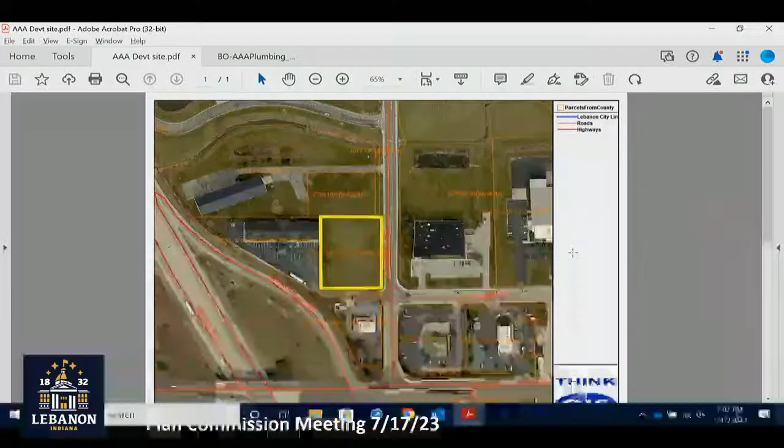Sure. Good evening, Commission. Thanks, everybody, for making it out tonight on a rainy evening. We'll get started here. If we want to go ahead and pull up the site map, we'll get you oriented to where we're at. We are just off of Sam Ralston Road.

The subject property highlighted in yellow, with I-65 all around the west. We've got the White Castle on the south, Quality Inn Hotel on the west, PSG Holdings with an undeveloped parcel to the north, and Aspire, a mental health facility, just to the east. Sam Ralston Road runs along the east side of this property. The developer is proposing to construct a 6,000 square foot speculative multi-tenant commercial building.

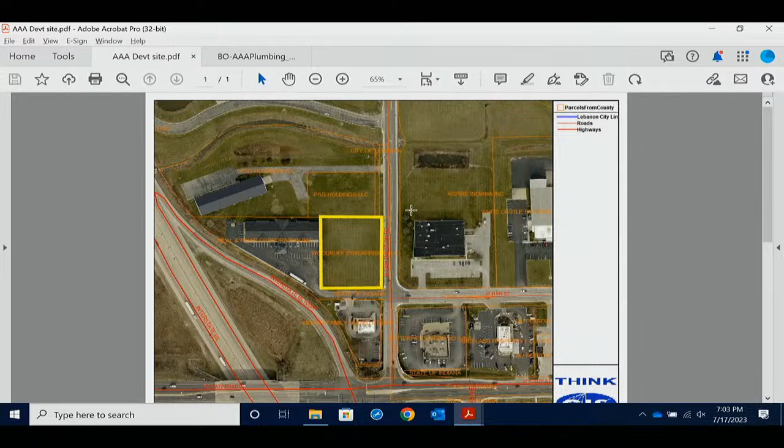We'll get into the overview here. On the site you're seeing now, north is to your right, so west is on the top of the page. Sam Ralston Road is running along the east side of this. What you can see here in the middle is the proposed multi-tenant, 5-space commercial development.

The developer is proposing one end for a drive-through, with a drive-through window at the end with appropriate queuing lanes along the south and western side of the building. The applicant is also proposing a pickup window on the north side, which is different than a drive-through. A pickup window is just for picking up your order, versus a drive-through where you place an order and wait for the food to be prepared.

On the south side here, we have a shared entrance, shared with White Castle, just off the screen, and the Quality Inn Hotel. There is an existing cut to the north along Sam Ralston Road, so this development would have full access on both the north and south sides.

Two-way traffic is proposed through the main drive aisle, but one-way traffic around the exterior of the building. We have 28 parking spaces proposed, including 2 ADA compliant and 2 dedicated motorcycle parking spaces. The applicant is also proposing, as shown in green, the appropriate perimeter buffer and parking lot interior landscaping required by the Unified Development Ordinance.

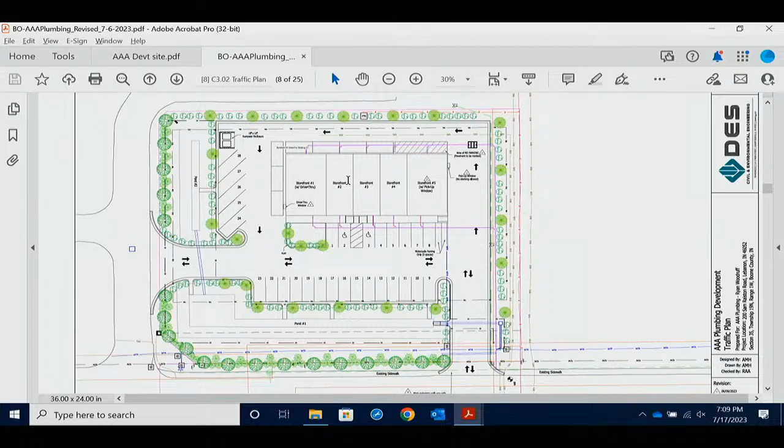The third condition, that the applicant submits a signage package that meets all applicable UDO standards for approval prior to submission for permits of signage. And then lastly, the applicant submits architectural plans and elevation drawings indicating proposed building materials that meet all applicable UDO standards and approval prior to submission of permits for any site improvement or building construction. And with that, I'd be happy to answer any questions that any of you may have.

Commissioner, any questions for Matt? Okay, hearing none at this time. The applicant care to step forward?

Good evening, Plan Commission. My name is Roger Azar. I'm the design engineer that you saw my plans up there. Matt, thank you for the very thorough explanation. We do intend to meet the 3. We addressed all the engineers' comments. We responded back with a response to comments, including the drainage.

So the 3 items that remain are the architectural plan, the lighting plan, and the signage. And the owner has communicated with an architect that will fulfill those requirements. We ask you today to please approve that with the conditions set forth.

The site has been a fill area. They brought in a lot of materials, maybe when they built the 65 ramp, or maybe when they built the hotel. So there's a lot of studies that we need to complete on the site. We did preliminary geotechnical work and found out that there's quite a bit of fill. So the owner wants to proceed, but he is very reluctant to spend any more money because it's going to be costly without your approval. With the other 3 items being conditional, obviously he's not going to get a building permit until those conditions are met. So we please ask your consideration to approve that so he can continue moving forward with this development.

And on top of that, I want to show you some items. Is this working, Ben? Can I show these? I'll pop it on. How do I? They'll give it, just a second. Well, I guess I'm not going to be able to do that. It's there, just give them a minute. Is it up there? Okay, great.

As you can see from some of their cross-section profiles, they're going to be raising the entire site. That highlighted area is fill, and that's right where the drainage is. They're going to be raising the entire site in different places by about 4 to 5 feet. The whole site is going to be about 929 feet. So that's many feet of fall onto our property.

Their proposed drainage outlet, well, it's not really an outlet. They're just going to open the floodgates and let everything flow into what they call a swale. It's not really a swale out there, it's very flat up there. There is no swale on Sam Ralston Road. They're just going to let the water flow unimpeded from their property line to ours and to the roadway as well.

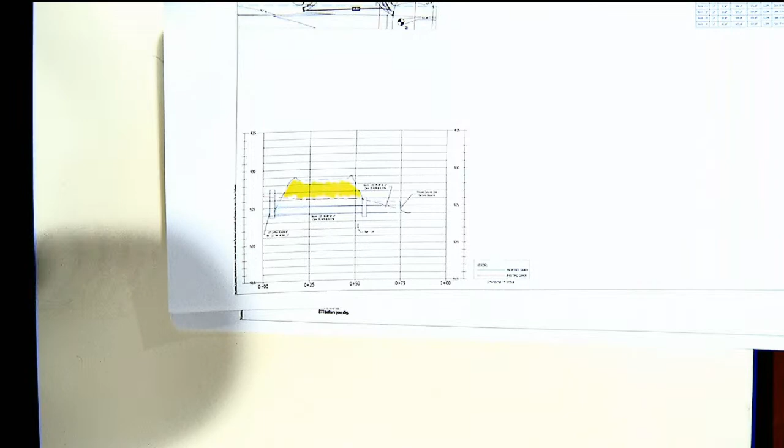Carrie Daly, who, for those of you who might be new to this plan commission, is the outside drainage consultant for the city of Lebanon at Christopher Burke. He caught this issue right away, and he indicated that the drainage outlet should be piped.

Our northern property line between PSG Holdings and Menards is a big legal ditch. It's a very deep legal drainage, county legal drain. He indicated that they wanted the stormwater discharge to be piped all the way from their northern property line through the right-of-way for Sam Ralston Road to that ditch at the intersection of Sam Ralston Road and the ditch.

We also have no objection to providing them and working with them on a drainage easement of some sort if that's not the appropriate location to put it. But we've really had no communication whatsoever from them. They entered onto our property without consent or knowledge and drove a PK nail through our driveway, and that's about the only extent of communication we've had from them. That said, we have no intent to charge them for a drainage easement. We just think it's in the best interest of your roadway, of our potential future development of the outlot, and for their project as well, to pipe the water underground all the way to the drainage ditch.

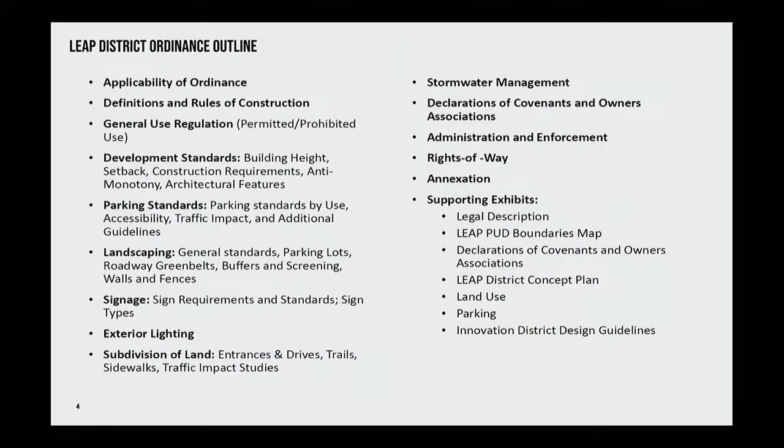The standards are called dark sky standards, and I'll talk to you about what that is as well. This ordinance before you today is a full-blown PUD. It's gone through full legal review, and it has a number of supporting exhibits at the end, and we'll go through what that means.

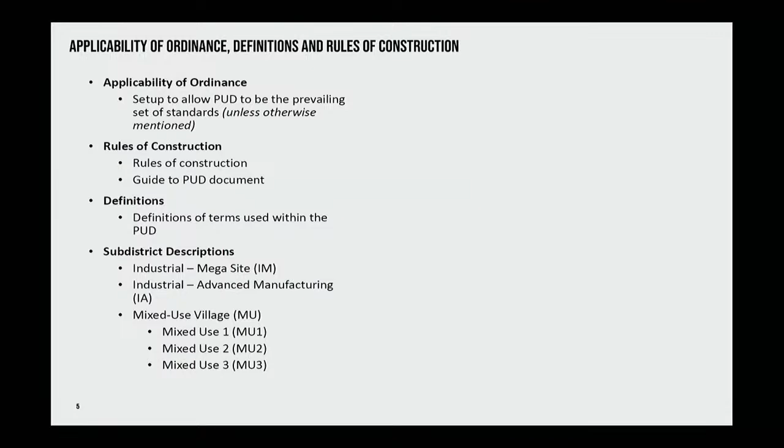There's also the administrative function of it. It works with the city's existing UDO and PUD process, which allows for this to be set up in such a way. There's rules of construction, there's definitions. As Scott mentioned, we've paid a lot of attention to definitions, and we're really trying to tighten those up at this point for the benefit of the community. As far as zoning, this whole area is the LEAP zoning, but what we've devised are sub-districts within those that have their own set of standards, and we'll go through that in a moment as well.

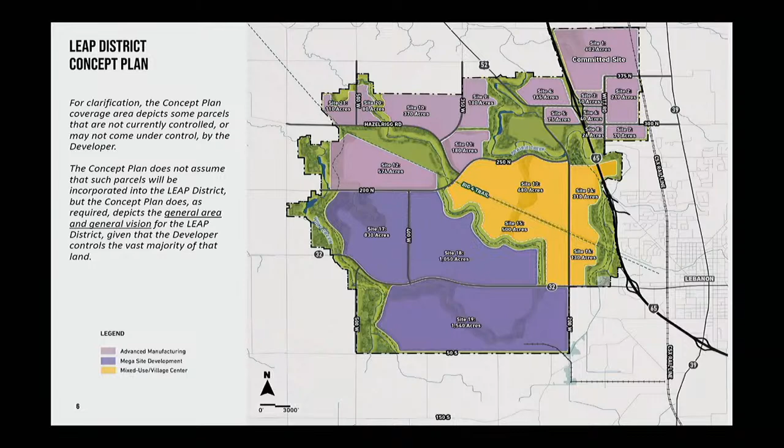As far as the concept plan is concerned, we talked about that larger development scale stormwater approach. We'd like to really focus in on those areas and direct some really innovative stormwater approaches to those places.

This is a traditional PUD in that it has a list of permitted and conditional uses, as well as some expressly prohibited uses. As you're aware, the city has additional conditions that can be put upon conditional uses as we go through this ordinance. We've illustrated some of those for specific uses where there's things that, for instance, the IEDC wants to make sure are covered as a development comes to the table with a potential conditional use. And then you all, as a plan commission, can, of course, add additional conditions.

As we look at development standards and design standards, I'll point to a couple things we feel are very innovative, but also offer significant protections for adjacent properties outside of the LEAP district. So I mentioned natural corridors. In general, those would be existing stream corridors that may fall on the outside of the district or within the district. A lot of them are channelized ditches at this point, but there's really an opportunity to bring back and pay attention to that.

The term is replumbing, but thinking about how we can really direct stormwater to areas that are naturalistic, that would include wetlands, so that stormwater could be cleansed before going into that area. And then, of course, developing amenities.

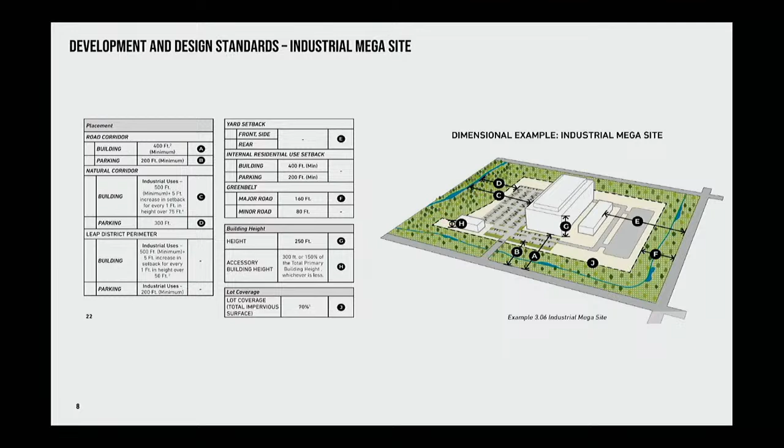I'll keep going through - advanced manufacturing is the other district we talked about. This district has a similar sliding scale perimeter setback along the LEAP district. Along the natural corridor and the road corridors, it does not have the sliding scale setback, but still has a significant setback at 300 foot along a major corridor - a state highway, for instance, would be a major corridor. There's parking setbacks built into that as well. Along the natural corridor, it would be a 400-foot minimum.

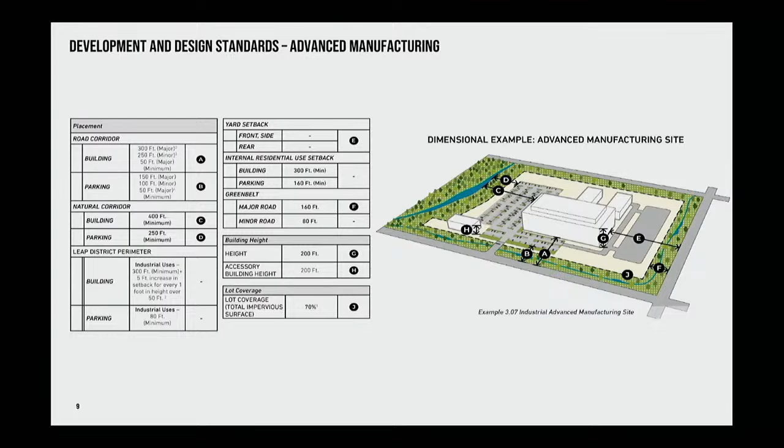The height is significantly less on the advanced manufacturing sites, so that justified the step down. Along the perimeter, you have that same degree of intensity with the district perimeter, with the 300-foot minimum buffer there, with a 5-foot increase for every 1 foot in height over 50 feet. And then that 160-foot required planted buffer is a requirement within this area as well.

So this kind of breaks it all down here. But you can see we've put a lot of thought and attention into what happens in these setbacks. Parking can occur, but not within the area of that 160-foot greenbelt or landscape buffer. Within that buffer you can have roadways, sidewalks and trails, fencing, things for public safety - that's about it, and it's a heavy landscape buffer. 160 feet is a large, expansive area.

And this is an example of graphically how this might lay out. So what you're seeing here, on the bottom of the screen and the top of the screen, on this large site, is an example of that 160-foot roadway greenbelt. And then within that also you see the 500-foot setback, and you see parking - well, parking's got to be 200 feet out. So essentially you've got that 160 foot, then another 40 foot, then you can start to have parking.

The goal there is that with that 160 foot district perimeter greenbelt, which is heavily landscaped, once those trees have matured, you will not see that parking at all. There also may be fences and berms required as part of that as well, to provide more of a quicker impact as trees do grow over time.

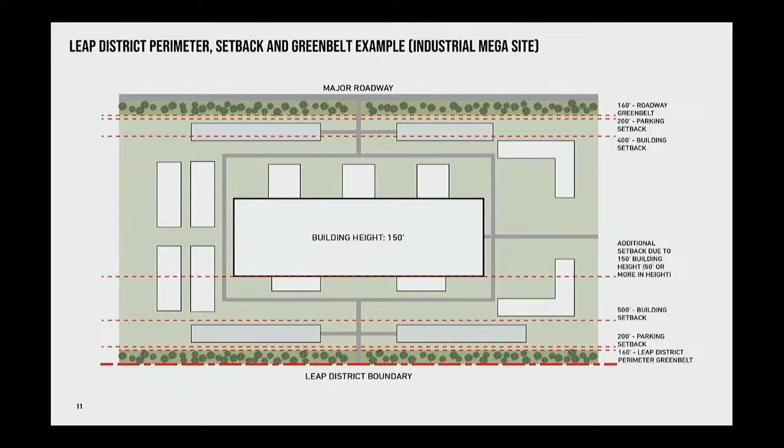Residential setbacks—there was some concern about how a development might work with an existing residential. So we've put together the same level of standards that we shared with the prior one, including that large setback, the 160-foot greenbelt in that area as well.

You can kind of see on the right-hand side of the screen how the properties, whether or not they're on a road, would be protected by that greenbelt. And then there's an additional building setback. Parking could be in that building setback, but even with a 50-foot tall building, you're several hundred feet away from that development. That's an additional way the IEDC felt we could accommodate and ensure that residents today, as well as in the future that might be on the perimeter, or property owners within the interior of the LEAP district that choose to remain in their home, would have that significant and protective buffer.

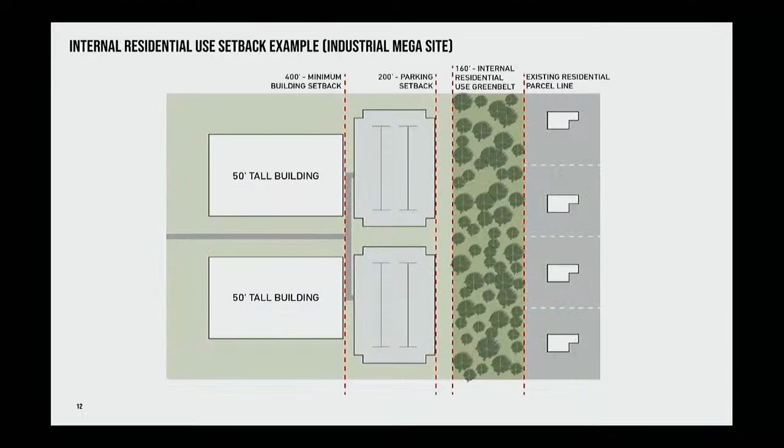Real quick, just for confirmation—so the slide directly before that had the road frontage with the setbacks. So even if that residential were at the side of that building, it would require those setbacks as well. So it's not from the front, it's from whichever side that residential is on, correct? That's correct. So that's why we have both the roadway setbacks and the interior setbacks, to try to create protection from all angles, because we know there will be some instances where there isn't a road buffering between a residential property and an industrial property. In a lot of cases it will be a road, since most people are situated on county roads, but we wanted to make sure we baked that protection in just in case. Okay, perfect, thank you.

The mixed-use district—we've talked a little about this. The idea is that this is another area that, as it's developed, would be buffered. So as we were thinking about the map I showed earlier, there's the creek that goes through the middle of the site, meandering from the north down to the southeast. The idea is that north of that, and also along the Big Four Trail, we could begin to see a mixed-use area develop.

We've put together fully baked standards for a mixed-use walkable district that could service this district, with appropriate uses associated with that. We think this could be a significant opportunity for people to live very near where they work as this area develops over time. Think about trail-oriented development, think about Midtown Carmel—maybe with a little drop down in scale—but think about how the Monon's been activated through there. That's really how we've written these standards around the Big Four.

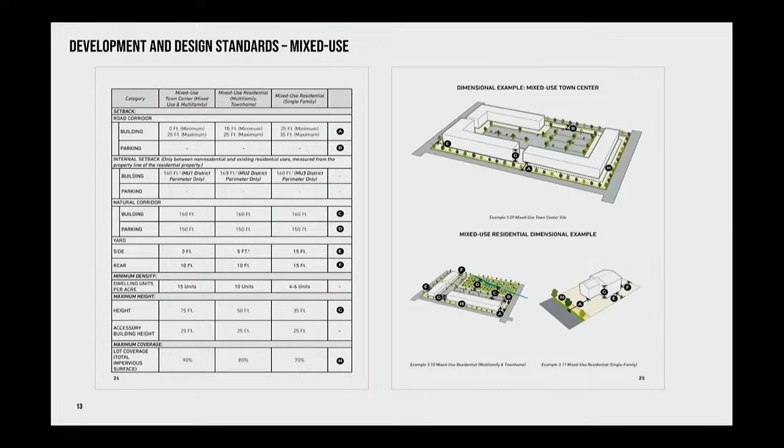The idea is to allow for what we call mixed-use town center, which is mixed-use and multifamily development in certain areas, allowing for a step down that would be smaller scale multifamily and townhome development, and then also potential for single-family development in this area as well. I think that would be further defined as a development plan might come before you in the future, but we wanted to allow for that zoning to be in place if the right development came to the table, so it could be considered as part of this process.

Other standards we've brought to the table and worked closely with the city on are how do we make the aesthetics of these buildings—whether industrial, commercial, or even residential in nature—develop in a way that's very intentional. We've heard a lot about what people don't like about development that has occurred over the last several years along our major interstate corridors, so we've taken a lot of that into account. We've thought through heights, encroachments, locations, where to site a building, how the building should face a major corridor, and also architectural performance standards.

And by performance, I don't mean sustainability at this point, but more design standards—where should facades be broken up, where should materials change, how should we treat corners. These are additional standards we've included both in the PUD itself as well as the design guidelines. The goal would be that as a petitioner comes to the city, they can sit down with the design guidelines and say, let's really think about how we can achieve something of this quality—and, by the way, we require this in the PUD as well.

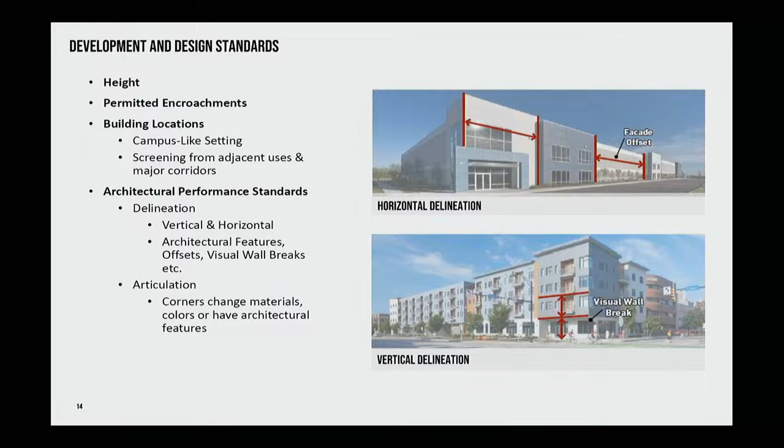Anti-monotony - you've probably seen that required in a lot of developments, but we require it for all districts. The goal is to not create no-place architecture. We really want to emphasize architecture that creates quality of place, whether you're in a mega site or in the mixed-use district.

Other important things include outdoor storage, dock doors, mechanical installations, and loading and service standards that we've written in. Those are also heavily buffered and landscaped, and need to be sited intentionally. In some cases a traffic study might be required to make sure a loading area is properly sited along a corridor and isn't causing a traffic issue.

From an environmental perspective, we've done a lot of research on best practices throughout the country and are trying to bring some of those forward to this district. Some users, Lilly being one, are very interested at a national and international level in being at the forefront of thinking about energy and materials - how they develop a site in a way that attracts top talent while being light in impact, knowing they're developing a large site.

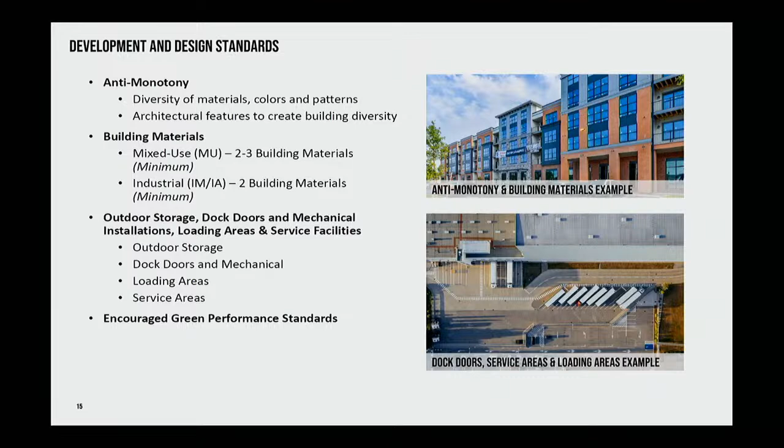Parking - we've thought a lot about it. A lot of these big users likely will do their own parking study, but we have baseline standards that also respect the standards in the UDO. We've been thinking about shared parking, reduced parking, and new technologies tied to parking like electric vehicles that need to get integrated into the standards.

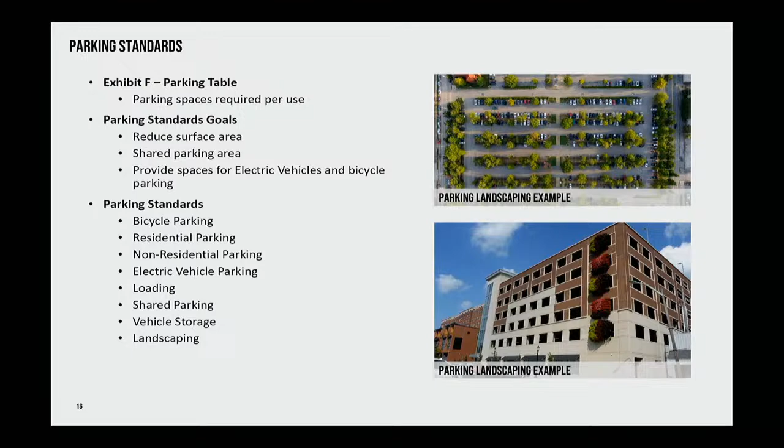You see the image on the top right - the parking lots need to have significant landscaping and stormwater features, so we built that into the standards as well. Bike parking is also included, and we've thought about how those different parking types work together to create a shared transportation system - not just about parking and going to your destination, but really thinking about parking once.

I talked a little earlier about roadway greenbelts. We feel this is a really innovative way of thinking through these corridors, while also providing significant buffering areas and a place for stormwater to occur. I mentioned the 160-foot buffers in some of the interior areas.

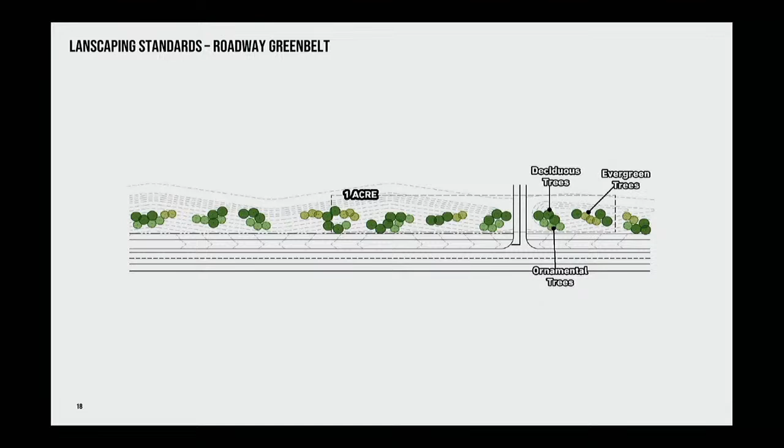This is just an illustration - not a perfect example, but you can begin to see how you have a very significant buffer that starts to fill in, with trees and landscaping clustered. This area would include trees of different sorts with a focus on natives, really trying to promote Indiana native trees, as well as required shrubs and grasses that could be planted to create a prairie type buffer for additional screening.

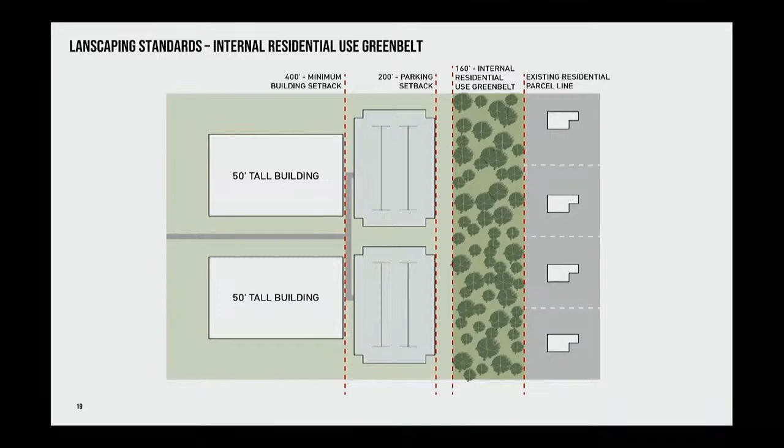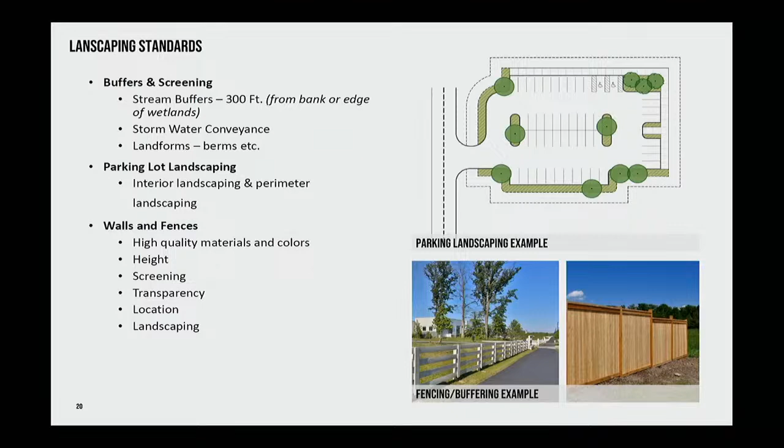As we think about these buffers and how they're intentionally landscaped, the idea is to create something naturalistic, resilient, and relatively low maintenance, while building upon these areas. We talked about parking already, but it's important to reinforce that we're trying to bring best practices to the table for parking, buffers, screening, as well as fences and walls - we've got pretty robust standards for those too.

Signage - we've looked at the city's UDO, brought forward some of those standards and respect them, and included additional standards, especially in respect to the dark sky friendly goals I mentioned. That applies not only for buildings but for signage as well.

Dark Sky is a national, international organization trying to think about how to reduce light pollution and energy usage. Breaking it down simply, we've looked at the maximum amount of lighting intensity, called foot candles, required when a particular use is operational, when it's not operational, and what's required for public safety - we've tried to bake that in.

What we don't want to have here are huge billboards with 24/7 lights, like a lot of our gas stations or convenience stores with big bright lights. We really want to try to tone that down. That helps in a lot of ways—adjacent homes have talked about and are concerned about lighting and in particular light pollution. We also know light pollution is a detriment to our natural world and our wildlife, so we're really trying to bring what we believe is the forefront of thought on this to this project.

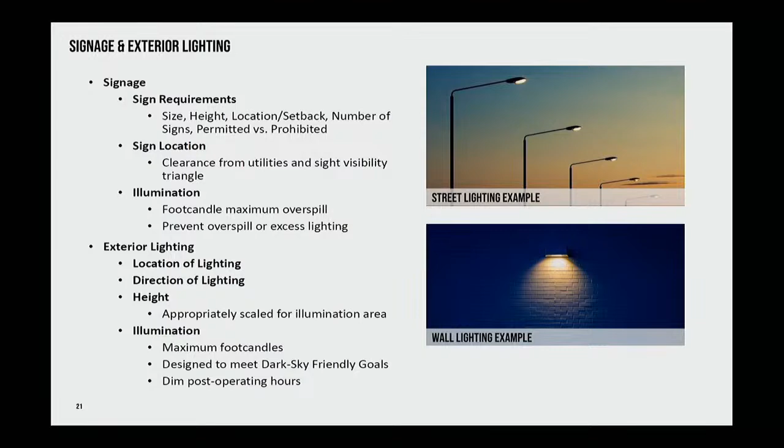It's an emerging science and an emerging best practice in zoning and subdivision of land. We're really focused on being intentional, but also rooted in the city's UDO, thinking about how properties are accessed, where trails go, where paths and sidewalks go, requiring all those things to work together as part of a network. We talked with the Trail Advocacy Group about the need for trail crossings and intersections, so we've built in standards for creating safe crossings.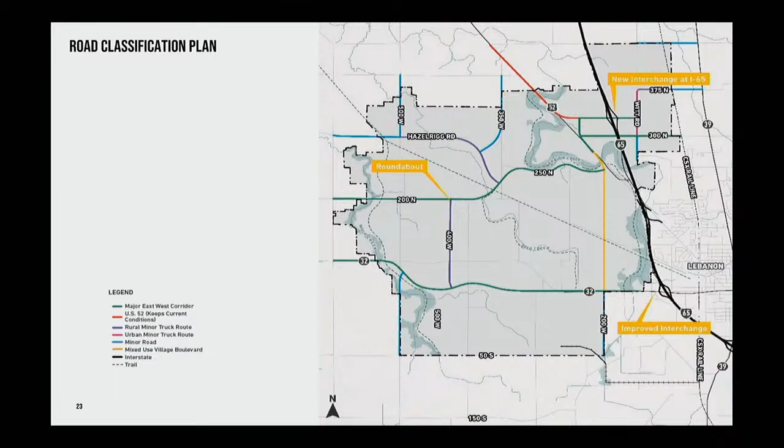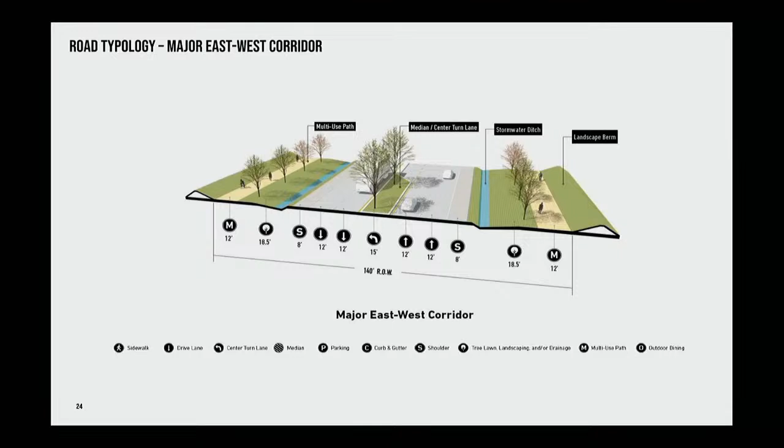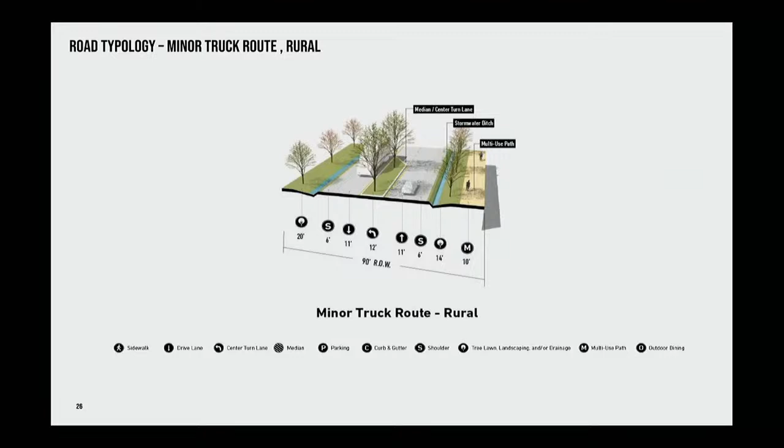If we think about roads, it's really about how we bring this together—how we manage stormwater, how we create significant buffers and berming, and how we provide good quality pedestrian infrastructure in a way that also allows traffic to flow as needed without causing issues. I won't spend a lot of time on these, but we have a whole host of different corridors defined in the ordinance, as well as different road types illustrated in the design guidelines. So we're thinking through how we can be intentional as we improve and build new roads, bringing something to the community that benefits this whole district, while thinking intentionally about how it all works together.

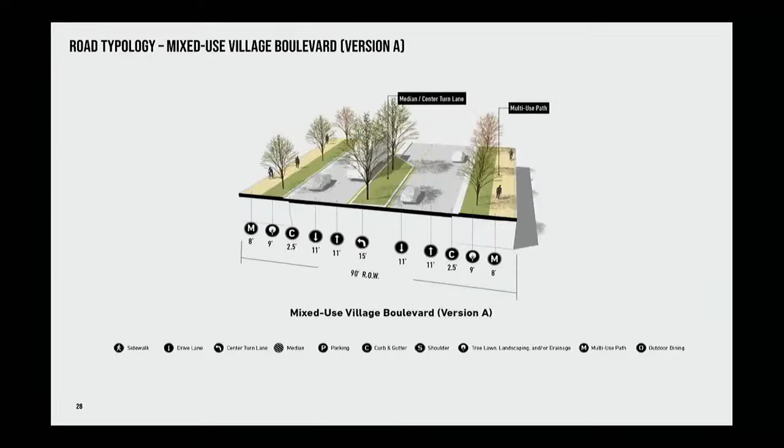I talked a lot about stormwater, but we're really excited about how this is a best practice and how it can create innovative stormwater district-type retention and detention strategies. We definitely respect the state and city's requirements, and we're going above and beyond—35% of stormwater must be retained or detained on site. But for that other stormwater, we're really trying to push the envelope. Stormwater banks are something emerging throughout the country.

This ordinance enables a group such as the owners organization to create a district, and within that district, stormwater credits could be bought by an individual user. They could essentially pay an impact fee into that, and then they'd have a portion of the site that would be off-site of their own, where their stormwater needs would be dealt with. It would not be a giant pond—it would be naturalized. I talked about stream corridors, and you could have wetlands built along those corridors.

The idea is that if you combine that with wetland mitigation—and we've had Christopher Burke looking at that, they're leading at the state level on what's called the ILF, the in-lieu-fee program through the DNR—we could have regional stormwater detention, by regional meaning the LEAP district, and also wetland banking for any impacted wetlands. You start to knit together this green network. That could become part of a significant central park strategy, creating a large area of parkland with a lot of different resources, both financial and property, that could be added to it, really doing some innovative things for this site.

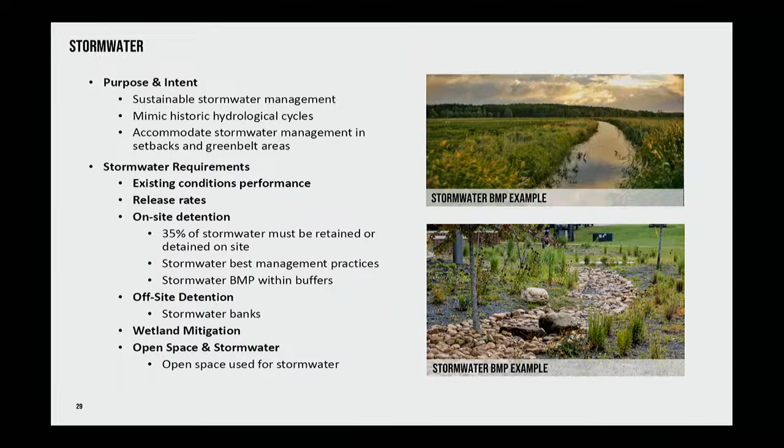We don't have oceans, we don't have mountains, so we wanted to really try to create something that's really special, and stormwater and prairie, kind of thinking about our creeks and streams, was something that was very important as the master plan was developed. So as we get to the exhibits here, we went through, I'd say, the bulk of the design guidelines as well as the PUD itself.

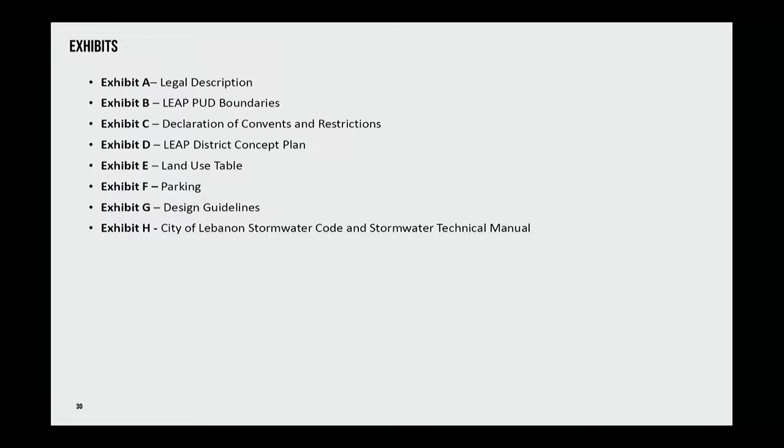We've got a use table, the parking, concept plan, so we've explained a lot of that. The legal description is many, many pages. I don't know that anybody wants to look at that tonight, but it's all prepared, within the full ordinance there.

The idea is that the Architectural Review Committee would be one more level of sign-off, and that group would have representatives from the city as well as the owners' organization and the county, to make sure comments are addressed even before it gets to TAC. Then from TAC, the plans would be modified, there'd be staff review, any required hearings, and then ultimately a development would be approved. So that's the process we've set up here.

So, good to be back before you with this update. We did have materials available and took public comment on this future land use and comprehensive plan update as part of the community open house we had back in June.

This is the official process through the state, as assigned by statute, to think through a guidance document. As Ben mentioned, this is really thinking through what the future land use for this area and the LEAP district will be. It memorializes the thought put forward as part of the LEAP master plan. Ultimately, the land uses are then codified as part of the PUD. The goal would be this land use update, as well as the LEAP Lebanon master plan, would be available on the city's website for public review and consideration.

The process follows statute and updates the future land use map to include the newly annexed property and the area identified as part of the master plan. We've provided recommendations on initiatives and objectives that match the master plan in the district, and we had the community open house. This follows a similar process to the PUD, but it would be adopted by council via resolution as opposed to ordinance, so it's a little different there. All this would be public on the website, a great way for people to view and learn about these changes, as well as stay tuned for future updates.

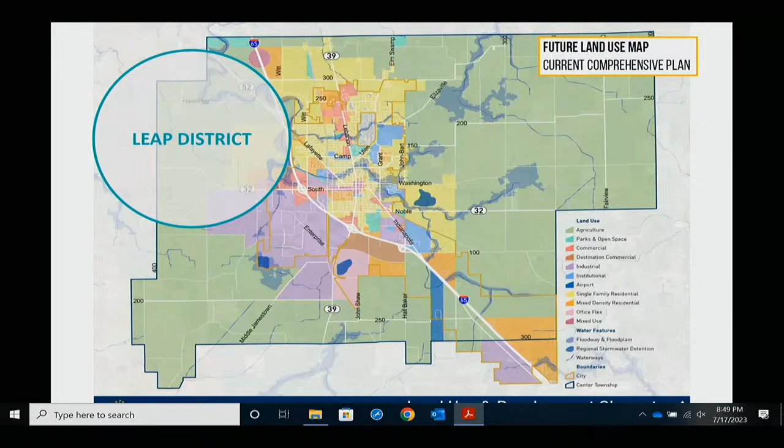So the current comprehensive plan, you can see the circle on the top left, the northwest, the LEAP district, wasn't detailed in the prior comprehensive plan. This brings forward what was considered as part of the LEAP master plan. This is a typical process when a master plan or area plan is done; communities often update their comprehensive plan with those recommendations. In this case, it's the larger LEAP Innovation District, and within that district, as we talked about with the PUD, there are a number of sub-districts or sub-areas with additional descriptions and information helpful as the community considers future development of this area.

With that in mind, we talked a little about the schedule, but we hope for a favorable recommendation and the ability to advance this to council on the 24th. Happy to answer any questions.

Real quick, just to clarify, you showed us the map of the LEAP Innovation District, and one of the questions that came up earlier was, what's the timeline? From my interpretation, when we look at these maps with boundaries that don't include houses, that sort of thing, we're talking 10, 15, 20, maybe plus years from today, right? Like these are master vision maps, not something that's going to happen tomorrow, right?

That's correct. Oftentimes a comprehensive plan, most communities endeavor to adopt anywhere from every 5 to 10 years. We definitely think for communities like Lebanon, where there's a lot of growth and change, the 5-year timeline is right. So the idea is this is the future land use recommendation, based on planning that's occurred in this area, and we would anticipate it be updated every couple years as conditions or projects may change. Does that answer your question? Absolutely, thank you.

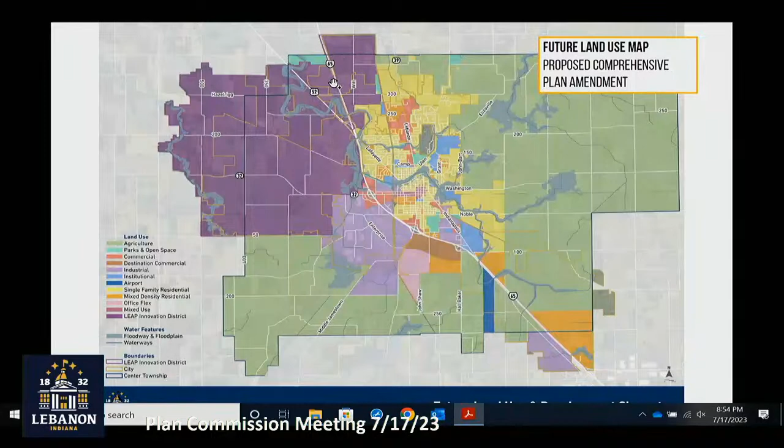Really up against, adjacent to what we know as a subdivision. Can you, instead of pushing it up to 300 -- if they could put the map back up, we could kind of point to where we're talking about. So that would be the area right here, for those unfamiliar with the north side of town. Right, this is right by Sunbrook Villas that village you see right here. So you've got an area between Sunbrook Villas and 300 North.

I think really what we're looking at there -- obviously those aren't significantly sized sites, so we'd be looking for more, I would say, transitional type LEAP district uses. And some of those areas, certainly, as you know, there's going to be an interchange in there, so the boundaries of the roads, et cetera, are going to theoretically change at some point.

But really, the idea was we've got the existing developed area, and then this area along the 300 North corridor, which we think is going to be ripe for some sort of LEAP-oriented development, whether that be other service or other type of entertainment uses or whatever. But that was really the intention there, is to look at that 300 North corridor as where the LEAP district kind of started in that area, based around the 300 North corridor.

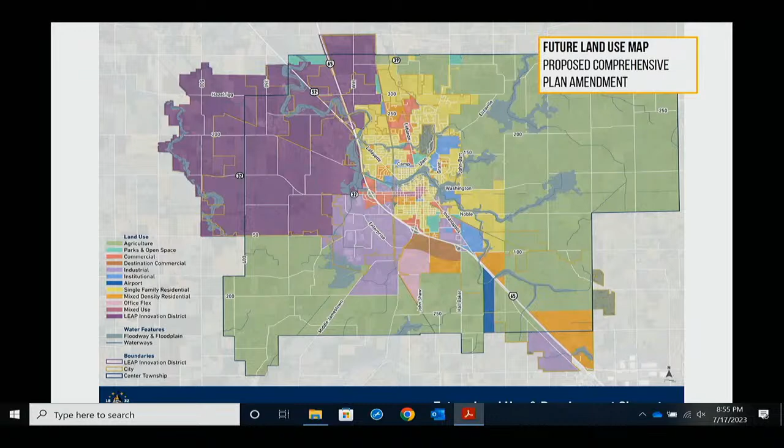Yeah, this is really just broadly suggesting, and like I said, this is just a policy document. This is not zoning, so this is not rezoning that to LEAP necessarily. This is really just saying broadly that we think this is something associated with the LEAP Innovation District. And once we dig down into further details of what makes most sense along that 300 North corridor, those obviously all come back through our approval process, and we'd have further review of those things. But this is just a policy document that suggests that 300 North corridor should be something LEAP associated, whether it's something Eli Lilly related or a use like that, or something that supports the LEAP district.

Thanks. Thank you. Anything else? Ben, Aaron, Scott? Nope, just again, a reminder that we're looking for a recommendation tonight from the Plan Commission to forward this to council.

Well, thank you guys for putting a well-thought-out plan, being very available to everybody. Ben, you and your staff always do a good job. We'll look for a recommendation to move this to the council. I motion we forward docket 23-46, the LEAP Innovation District Comprehensive Plan Amendment, to the Common Council with a favorable recommendation. I'll second. Motion and second.

All those in favor say aye. Aye. All those opposed say nay. Any abstains? Moves forward with the favorable recommendation.